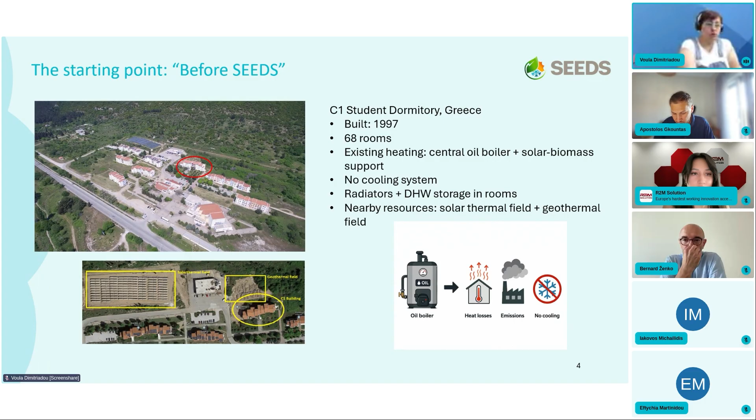So the ambition was to go beyond the boiler, from an oil-based heating system to electrify the heating and cooling system of the university, and ultimately turn it into a smart, flexible, renewable-energy-powered operation. The goal was not just to get rid of the boiler, but also to create an integrated local energy ecosystem.

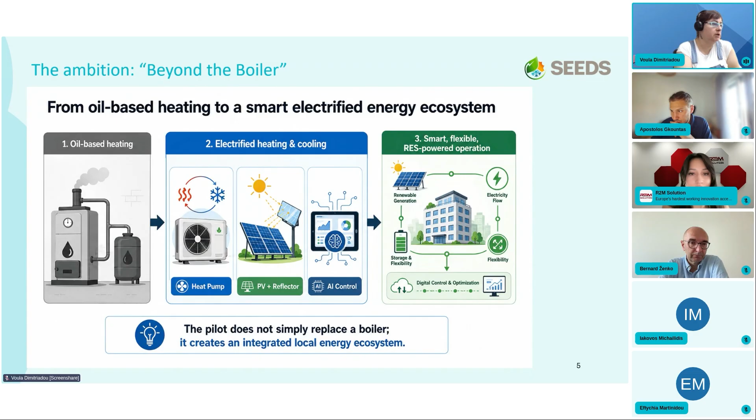So what we really did in the building was install a photovoltaic system with a reflector, a heat pump, and also lots of sensors that could provide us with data for temperature, humidity, and carbon dioxide emissions within the rooms, so we can measure the living conditions and air quality. We also installed an electric vehicle charging station just outside the building, and all of that was connected to each other with a smart management system that can control the energy produced and how it's used within the building.

The way our pilot site works is that, let's say, the hero here is the heat pump, for which Apostolos will tell us more next. The heat pump uses as an input the geothermal field and the energy produced by the photovoltaics, and whenever that energy is not needed, whatever we have stored we either give it to the electric vehicle charging station or keep it stored in the batteries installed within the photovoltaic system. So the energy for the building comes directly from the photovoltaics system, or mainly from the heat pump.

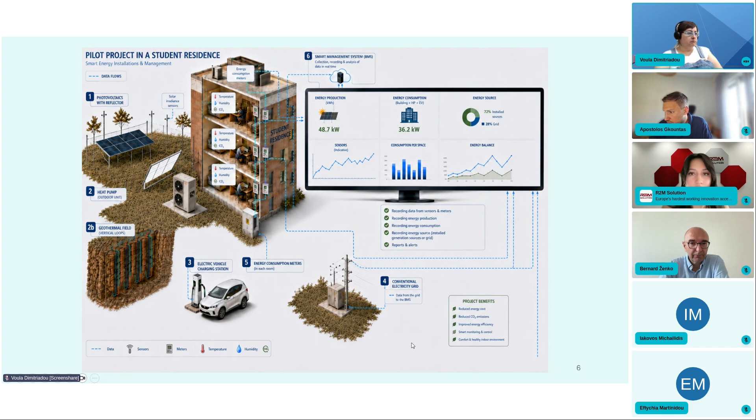Next, the Greek partners here involved. The Greek partners involved are the Democritus University of Thrace, which is the pilot leader for the pilot site. They have provided us with a geothermal field and the building, of course, in which we test all the assumptions we've made for the energy give and take.

Renel, who was and still is responsible for the electrification project coordination and for installing a bifacial PV system with a smart reflector. Psyctotherm, who is responsible for the multi-source heat pump, and CERTH, who is responsible for the digital systems, AI tools, and smart building controls.

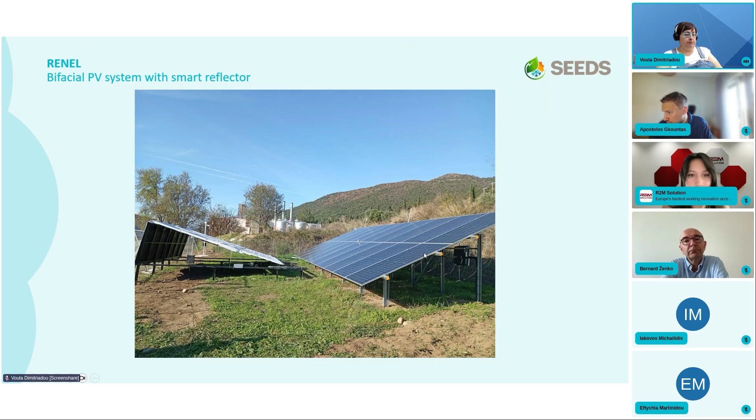What Renel practically contributed to this project was the installation of, as you can see in the photo, what we have already installed, the bifacial PV panels and the reflector, which contributes to the production of energy of the bifacial PV panels installed.

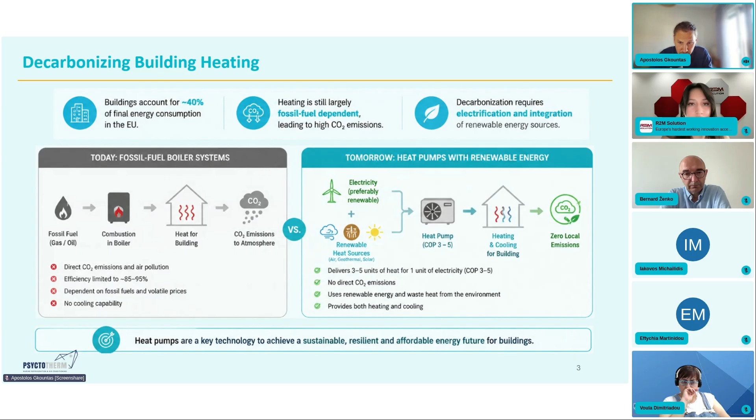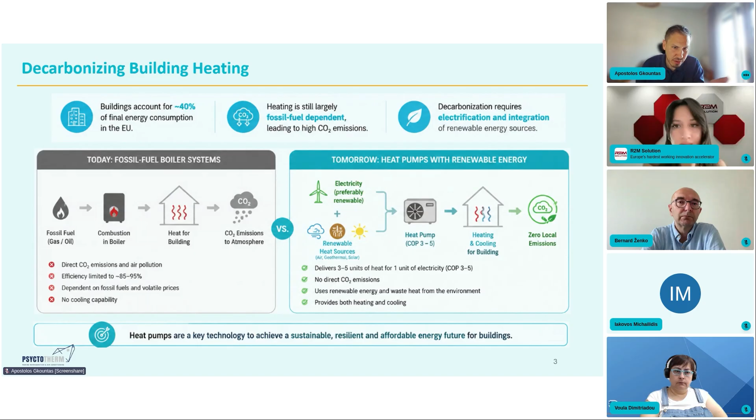So in SEEDS, we wanted to go one step further, not just replace a boiler with a standard heat pump, but design an integrated system that makes better use of the locally available renewable sources. Voula presented these sources so you have an idea, and of course adapt them into the operation of the whole building.

And after the multi-source heat pump, the thermal energy storage plays an important role because it helps decouple supply and demand and make the system operation smoother.

So on the demand side, the heat pump is connected to this TES system. And then this TES storage system is connected to the student residential building, delivering either heating during winter or cooling during summer. So the key idea is that the heat pump is not forced to rely on a single source,

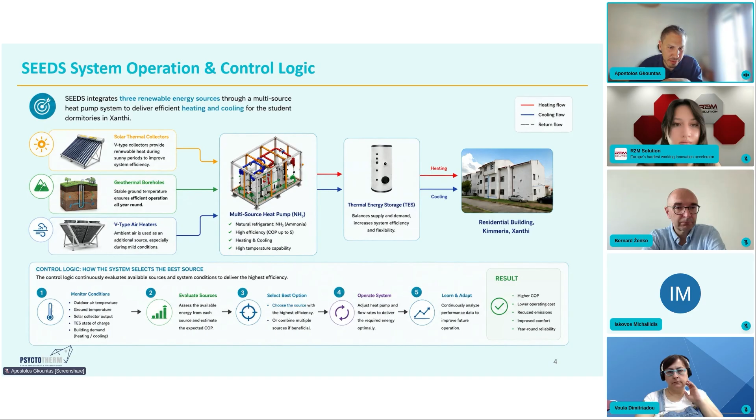So the heat pump is the heart of the system, but the system intelligence lies in how these heat sources are combined and managed, let's say. So now, why multi-source? That is the main innovation of the system. Why multi-source is better than a single source system?

The single source system depends, of course, on only one source and therefore inherits its limitations. Air sources are simple and cost-effective because they have only one dry cooler. But when the air temperatures get lower during winter, for example, the performance of the heat pump will drop. On the other hand, ground source systems are more stable because they have the temperature of the ground, which is more or less stable, but they require drilling and higher capex.

So the idea here was that we need to avoid this trade-off by combining the different heat sources, solar, geothermal, ambient air, and the control logic can select the most suitable source or even combine them, as I've said. So the heat pump will present the best operation, the best performance, presenting the highest possible COP, so the best OPEX in order to have long-term savings.

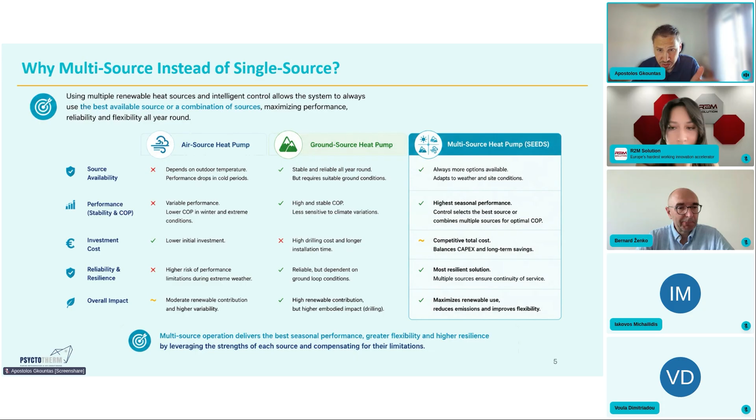So this approach, the multi-source approach, improves seasonal efficiency performance, while we can use also renewable energy. We increase flexibility because of the use of TES. And for sure, this system presents a better performance compared to a single source alone.

So after the architecture, a few words about the performance of the system. The system is designed for 120 kilowatt heating capacity and more or less 100 cooling capacity. Heating supply temperature is more or less 45, but of course we can vary the set point. The refrigerant is ammonia, and we have an operating temperature range from minus 10 to 45 degrees outdoor air temperature.

So the value of the system is not only the nominal capacity, either heating or cooling, but the fact that it combines this capacity with RES integration, improved seasonal efficiency and operational flexibility. So we have reduced CO2 emissions, lower operating costs, heating and cooling from one system, which we cannot meet really often. So greater flexibility and reliability in general.

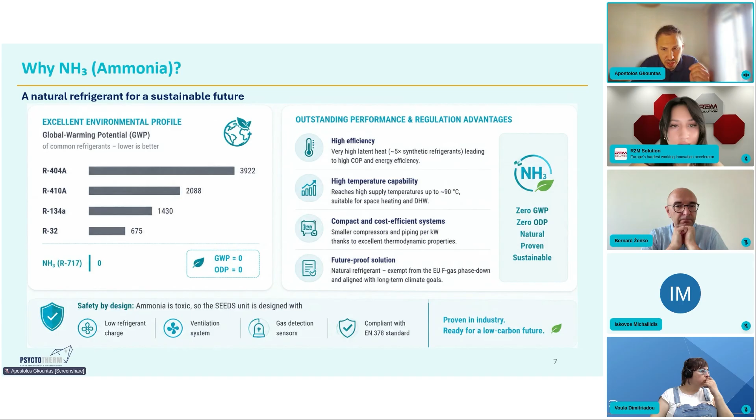But in this case, firstly, we have installed it outdoors, and the capacity of the unit is limited, so the safety issues are minimal. But of course, we have a proper machine room layout, we have ventilation, gas detection, and in general, everything is compliant with EN 378 standard. So, in general, the refrigerant selected supports the vision of the project, combining zero GWP, high performance, and robustness.

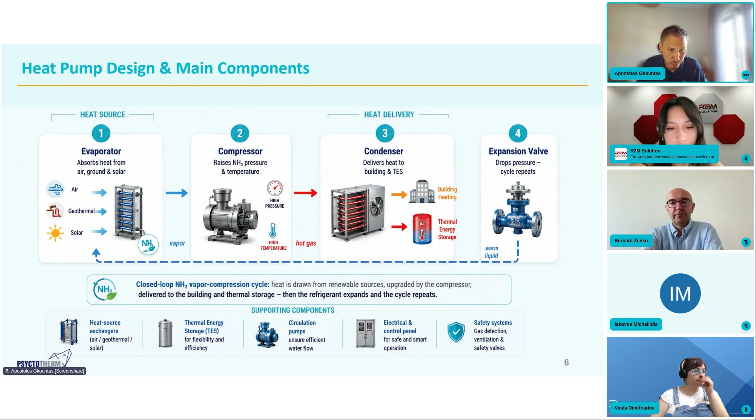Here we have the main components of the system. It's a typical ammonia vapor compression cycle. The whole system was designed and engineered by Psyctotherm, and you can see that it is a fully engineered building energy system where refrigeration design, hydraulics, thermal storage, and controls all work together to have an operational system.

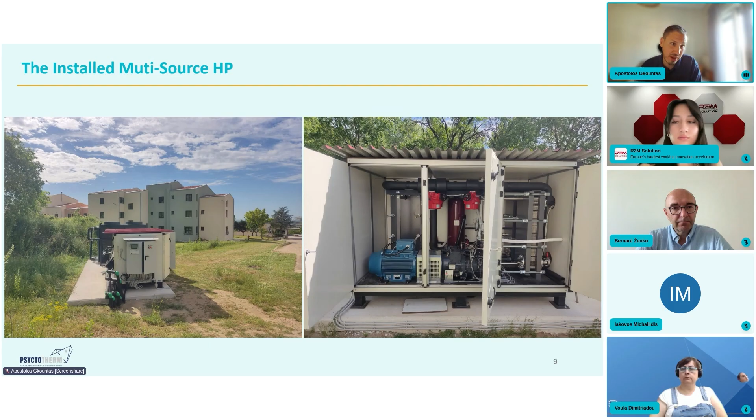So it has been manufactured and installed as a real prototype system, solving a real-world problem, as students required both heating and cooling. And here we have an integrated system that provides both based on the operational mode. And what I would like to emphasize here is the transition from design to implementation: the assembly, the integration of the ammonia refrigeration circuit, the connection to the renewable heat sources, so the hydraulic integration, and finally testing the control strategy in the field to fine-tune the operation of the different heat sources and their combination, which is the main challenge.

And to conclude, just a few words. The SEEDS project demonstrates a practical pathway beyond the fossil fuel boiler, by combining solar thermal, geothermal energy, ambient air, thermal storage, and ammonia as a natural refrigerant. One key benefit is also the flexibility. Instead of relying on one source only, the system can select the most suitable source or combine them, improving renewable energy use, reliability and flexibility.

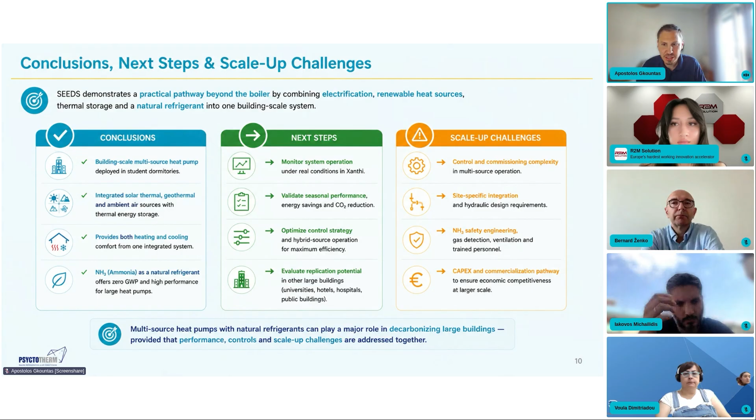The next step now is to validate, to have a long-term period of operation to monitor the whole system. And finally, a comment about the scale-up challenges: they have to do with the safety issues about the refrigerant charge, and the controls and hydraulic integration. But I would say that in total, the multi-source ammonia heat pump is a promising pathway for decarbonizing large buildings beyond the boiler. So that's all from my side.

Thank you, Apostolos. Iakovos, it's your turn. Yes. Hi. Hello. Greetings from sunny Greece, specifically Thessaloniki. Let me share my screen now. This is the presentation. Hope you can see it, right? No? Yes. Let me put it in. Now it's better, I hope. Yeah, right? Perfect. Okay.

So, just a few introductory words about CERTH. CERTH is a partner in SEEDS, this Horizon Europe project. CERTH is a large RTO, research and technology organization, in Greece. It's the first in Greece in terms of funding and projects. It was founded in 2000, and now it has more than 1,600 people working, researchers, and has 5 different institutes. Two of them, ITI, the Information Technologies Institute, and CPERI, the Chemical Process and Energy Resources Institute, are contributing together in this project for the Greek pilot.

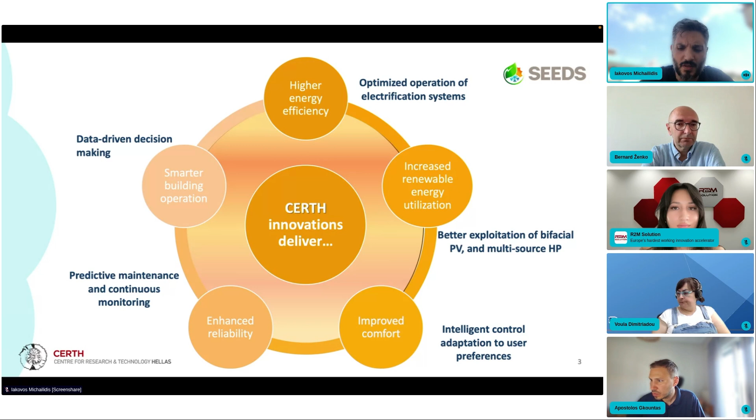CERTH innovations in general, just a high-level overview. CERTH mostly works with the digitalization part of the pilot. So it develops forecasting tools, artificial intelligence tools, and data consolidation tools for the Greek pilot. We are going to get into more details on that.

So the first, the heart of our developments and works, is a cloud data management platform, which is based on open source initiatives like FIWARE, in order to consolidate heterogeneous data measured by different IoT sensors: room sensors for indoor air quality, for energy, for thermal energy consumption, the consumption of the EV chargers, the data from the multi-source heat pump that Apostolos presented, also data from the inverter of the bifacial PV that Voula presented as well, and also weather data, of course, consolidating them into a harmonized and interoperable cloud environment.

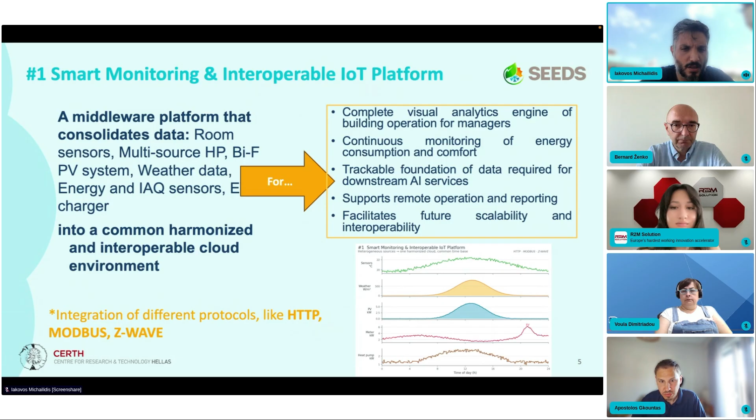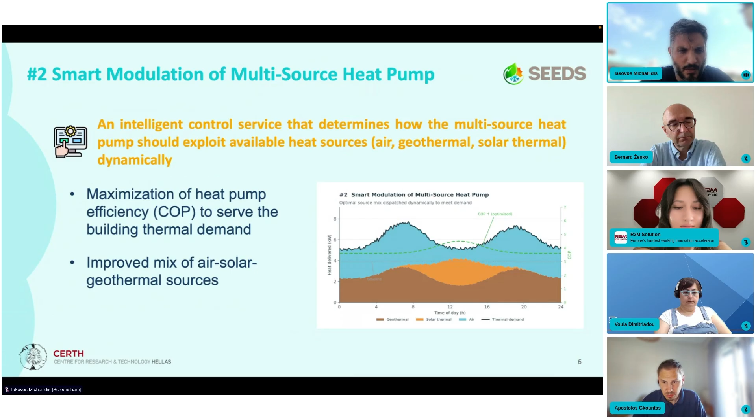The second tool that CERTH is delivering for this project and for this pilot is an intelligent control service that determines how the multi-source heat pump should exploit available heat sources. So it's a modulation tool for selecting the optimal mixture of heat sources each time for the multi-source heat pump provided by Psyctotherm, in order to maximize the COP, of course.

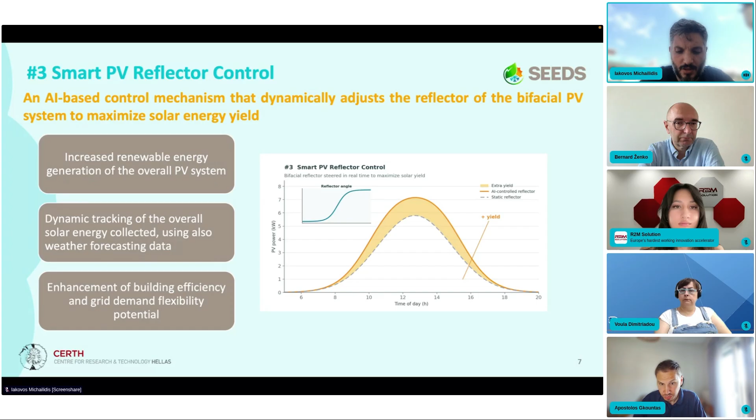The third tool is a smart PV reflector control. It is an AI-based control mechanism that dynamically adjusts the reflector angle of the bifacial PV system to maximize the overall solar energy yield, compared to and on top of traditional solar tracking georeferenced approaches.

The fourth tool is a predictive maintenance AI tool for heat pump and PV systems. So this is a fully data-driven, intelligent, low-intrusive predictive maintenance service that analyzes operational data to detect early signs of faults and degradation in heat pumps and PV systems. The innovation here is the low-intrusive part, because usually these kinds of tools and AI models require a lot of data of high granularity and of a large spectrum of features.

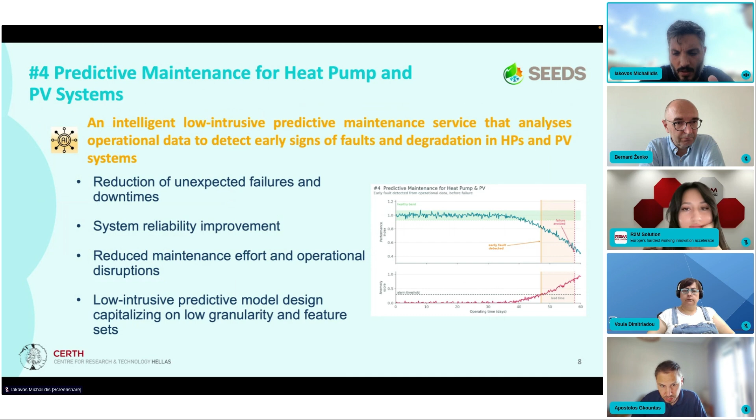So what we try to do is to make it much more practical in its application, using a very low set of features coming from the PV inverter and from the heat pump, instead of utilizing too many features, since practically these are not usually available in everyday applications.

The fifth tool for CERTH is a black box MPC, a black box model predictive control for the fan coil units used as emitters, as emission systems of the multi-source heat pump.

So it's a fully data-driven MPC service that controls emission units per zone individually in each room to reduce the thermal energy consumption without jeopardizing personalized indoor thermal comfort. What I have to underline here is that aside from the energy consumption that we try to optimize, we don't just forecast situations or conditions. We control, we actuate, we generate control decisions that are directly applicable to the fan coil units.

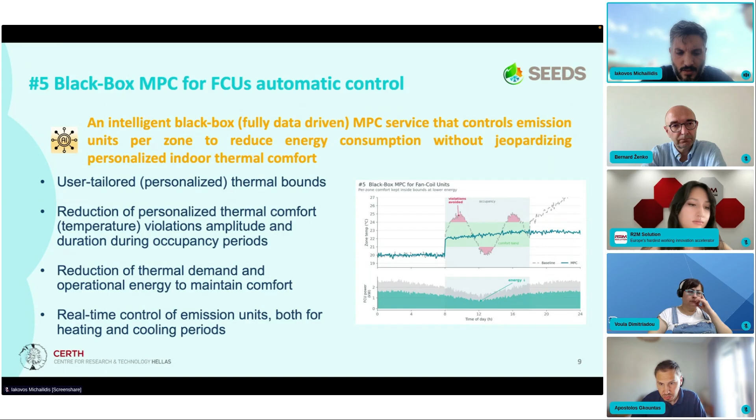And another thing that I would like to underline here is that we consider a personalized and individual profiling per room for the different tenants and users of the building. So the optimization here is tailored to each tenant's needs, instead of considering a generalized approach based on any international standards.

The sixth tool that CERTH is delivering and developing here is electricity flexibility management at building and district scale. So it's in practice a demand response service that collectively addresses grid signals and expected congestion incidents in a proactive manner. Also, of course, based on real flexibility estimations and not, as is usually done in other practices or in literature, the untapped flexibility.

So we don't consider the maximum or the minimum operational bounds of the systems, but we try to estimate the real flexibility according to users' needs and users' habits. So we don't want to intervene with them, and we try to stay within their preferences and habits always. This is the baseline for this approach. So we capitalize on that.

Of course, we capitalize on grid signals, expected congestion, and of course the available renewable energy generation or renewable energy availability from batteries in order to also optimize the entire system as a whole, reducing energy costs and grid dependencies, of course without jeopardizing, in this case, flexibility bounds extracted from past habits of the tenants.

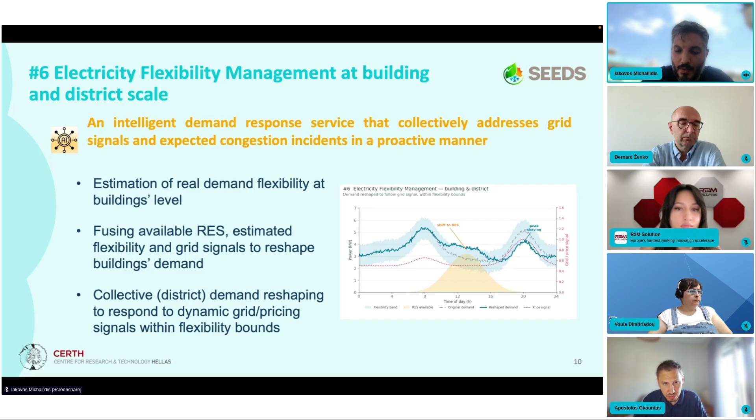No, we have time. Well, we are in advance. Bernard, the floor is yours. Thank you. So let me share the screen. Okay, hopefully you can see the slides. Yes. Oops, sorry. Okay, so hello to everyone.

My name is Bernard Ženko. I'm a computer science researcher. I mostly do research in machine learning, AI, and decision support, but I also have some background in electrical engineering. And what I would like to talk about today is an aggregator platform for explicit flexibility. So this is a system that we are developing within the SEEDS pilot, which is located in Slovenia.

And in this pilot, besides my institution, which is Jožef Stefan Institute, we have two companies collaborating. One is Petrol, which is an energy provider. They own a large number of gas stations throughout Slovenia and the Balkans. And the second company is Elektro Celje, who are a DSO, so they are a distributor of electricity, and they are in charge of stabilizing local electricity grids.

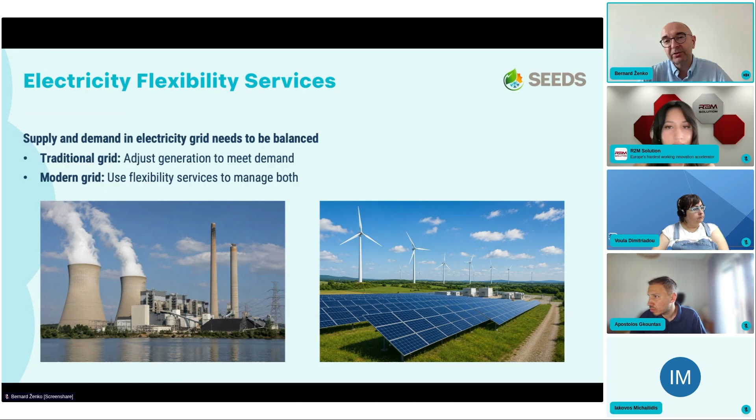So within our pilot, we had some objectives that we wanted to address. Basically, we wanted to develop a set of components for enabling this flexibility, right? And these components could be used in already existing buildings. So as I mentioned,

our partner Petrol owns a large number of gas stations, and these gas stations were actually our target. So we tried to equip these gas stations with some controlling devices that would enable us to extract flexibility out of gas stations. And of course, all these devices that are already installed at gas stations have to be connected to an aggregation platform, which then in the end controls the devices and provides the flexibility.

So our main objective was to exploit this energy flexibility from the existing buildings. And of course, we want to do this in connection to our distributor, which actually sends us a request for flexibility. Because of this, our scenario is on-demand or explicit flexibility. And our system in our pilot is evaluated in a set of gas stations owned by Petrol, which are located in different parts of Slovenia.

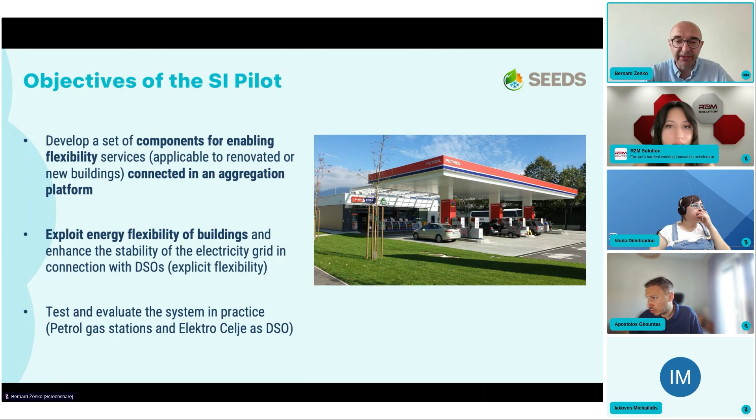So if I try to explain our use case for explicit flexibility in more detail, here we have this chart of actors in this diagram, but in essence, this chart tells us that once we get a request from our distributor, Elektro Celje, right? They actually have their own predictive models, which assess whether their part of the grid will be in need of additional electricity or will have too much electricity. And given this information, they send a request for flexibility.

This can be either positive or negative flexibility, which means that they can request that we reduce electricity consumption or that we increase electricity consumption, right? And this request is sent to our partner Petrol, or basically to our aggregation platform. This request is then automatically evaluated, which means that our aggregation platform estimates whether this request can be fulfilled for the next day, and if it can be fulfilled, what will be the benefits for the prosumer, which is the Petrol company, right?

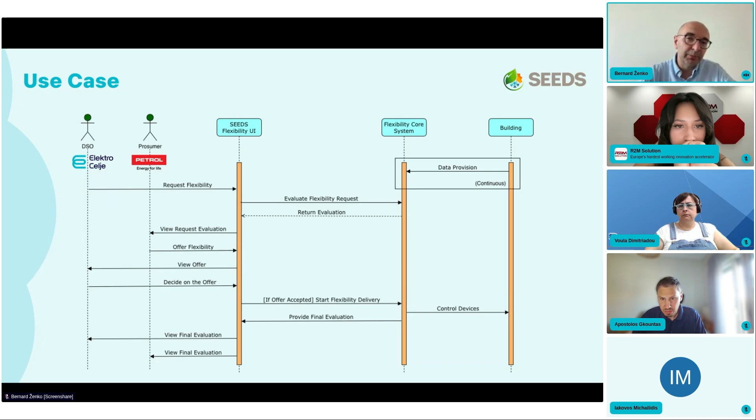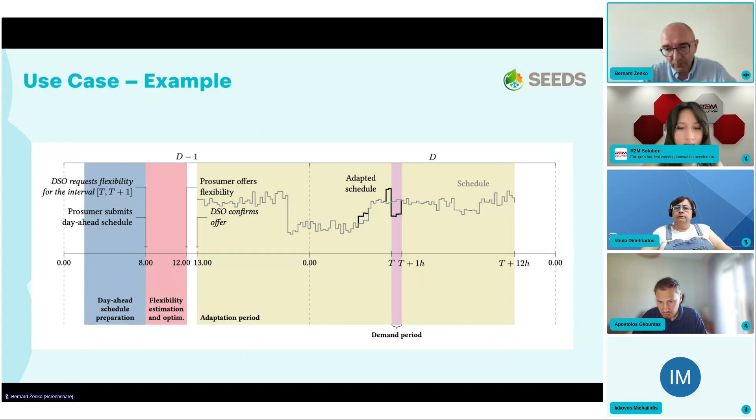As we can see, we have used a bit more electricity before the flexibility was requested, which is this purple bar, right? And then within this purple bar, we have lowered our electricity consumption. So this is how the flexibility should be delivered, right? But now, how do we actually manage to assess and provide this flexibility?

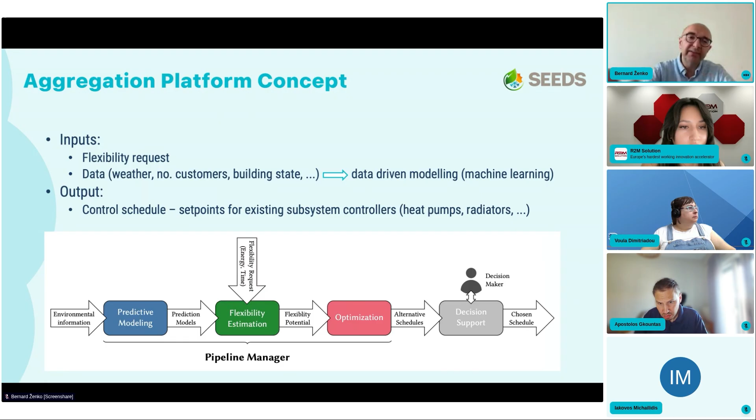And given this input, we then have another part, this red part, the optimization part, which uses this input in order to find the best alternative schedules for using or controlling the devices, right? And in the end, we have this decision support module where a decision maker makes the final decision whether a certain scenario will be selected or not. So this is, in principle, how the system works.

Regarding the details of how this system is installed at a location, for example at one of the petrol gas stations located at Bled, we've included in our system a set of devices. We use a heating, ventilation, and air conditioning system based on a heat pump, a heat pump for heating water for car wash, a heat pump for domestic water heating, a solar power plant, and so on. All these devices are connected to our system.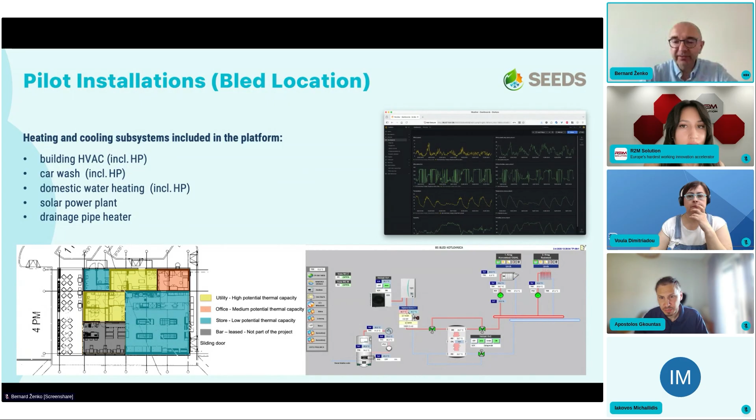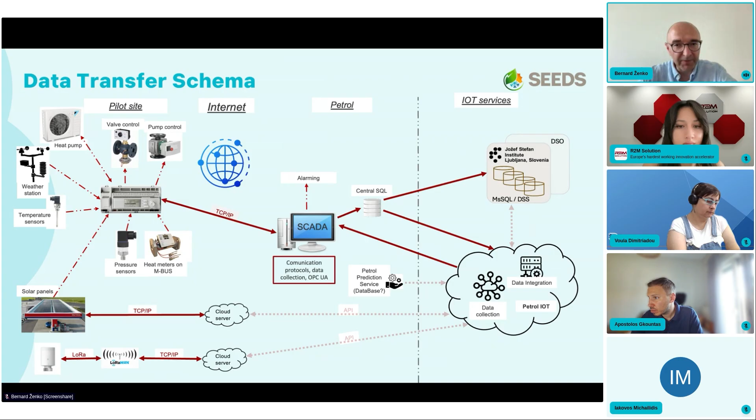These devices are connected mostly via TCP/IP protocol, but we also use different protocols for connecting different devices, because certain sensors in the buildings, such as door sensors, use cloud-based interfaces and so on. So we had quite a few issues connecting all the systems produced by different vendors to our system. On the left-hand side we have the system installed at the location, and then data is pipelined to a central server located at our institute, connected to the distributor, so that we've established all these connections for the system to work properly.

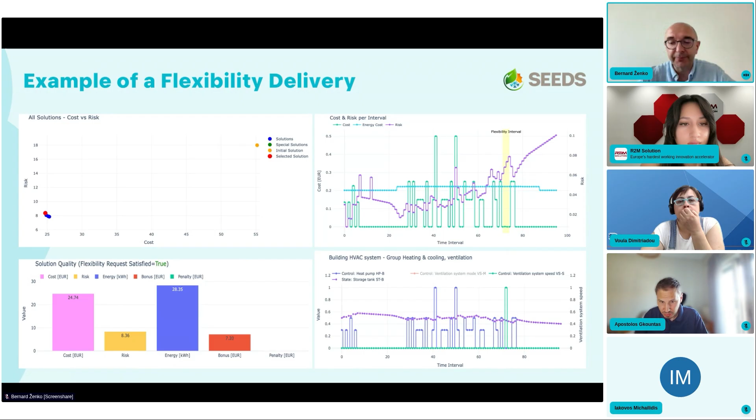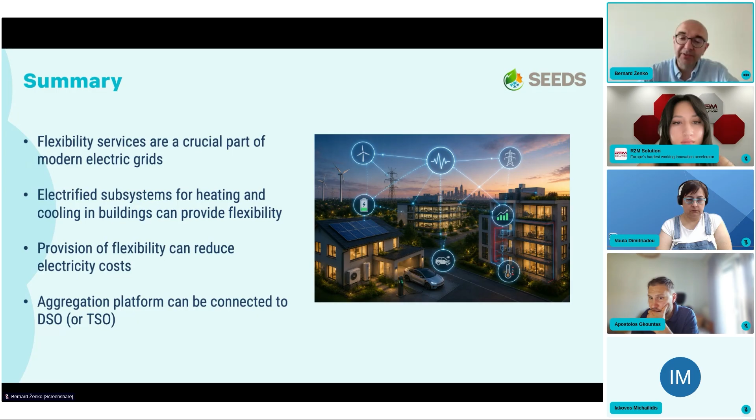To summarize, within this pilot of the SEEDS project we try to provide flexibility services which are a crucial part of modern electrical grids. We try to use the existing subsystems for heating and cooling in the distributed buildings to provide this flexibility. As a consequence, if a building provides some flexibility, it would also reduce the costs for electricity, so we have two benefits: reduction of costs, and stabilization of the electrical grid. And if our system is connected to the DSO automatically, it can more or less function autonomously.

So these are somehow the benefits of the system that we developed. That's more or less all I had to say. Thank you.